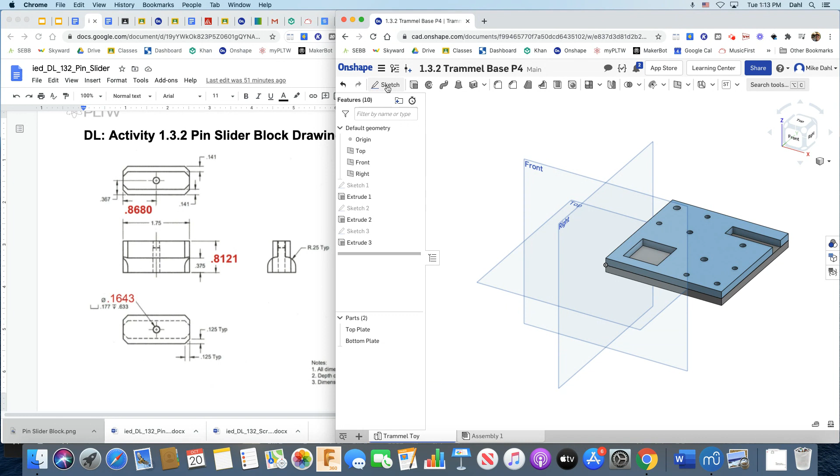Let's just start a new sketch on the top. I'm going to make this rectangular part here, and let's go ahead and make a rectangle. I need the overall length to be 1.75. That width only shows us half of the width, and that 0.367 gets you from the edge to the center of the circle.

So when I dimension this side, oops, let me move this over. When I dimension this side, I can say it's 0.367, and then shift 8 means times 2. So I'll get twice that distance, and now I've got it right there.

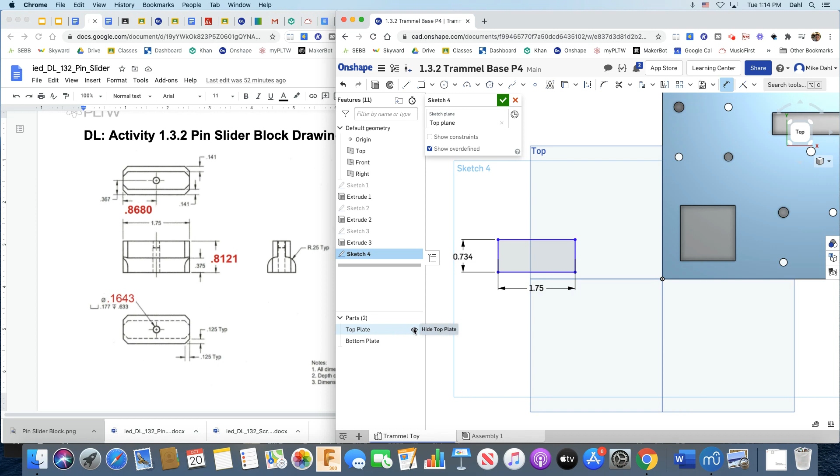Now, I don't really need to be looking at the top plate, so I'm going to hide it, and the bottom plate too, don't need those right now. I'm just going to focus on building this guy.

So let's extrude it up, this 0.375. Actually, let's go all the way, why not? What do you think? Yeah, let's go all the way. 0.8121, so let's extrude that. 0.8121 gets us all the way to the top.

Now I'll kind of subtract some of the material from there. And let's get this right here. Let's look at the right view, and that's going to be this here.

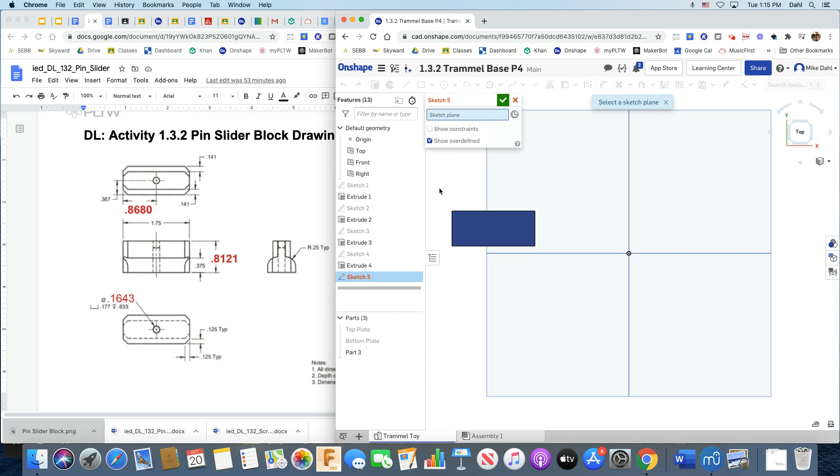So let me get rid of, let me go to the top, and let's remove this 0.141 amount there. So let me do a sketch on the top here, and let's grab this rectangle. I made sure that I got a coincident constraint there, and go all the way across, make it coincident there. That's good, this 1.75 is good. And this needs to be, oops, let me dimension it now - this needs to be 0.141.

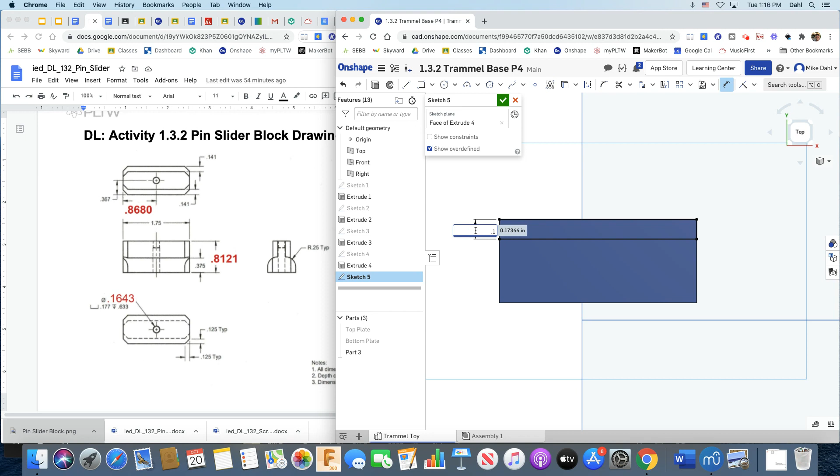Then let's do that again, another rectangle. Oh, look at that, how did it know I wanted 0.141 there? Cool. Now I'm going to take it a little bit out of perspective here.

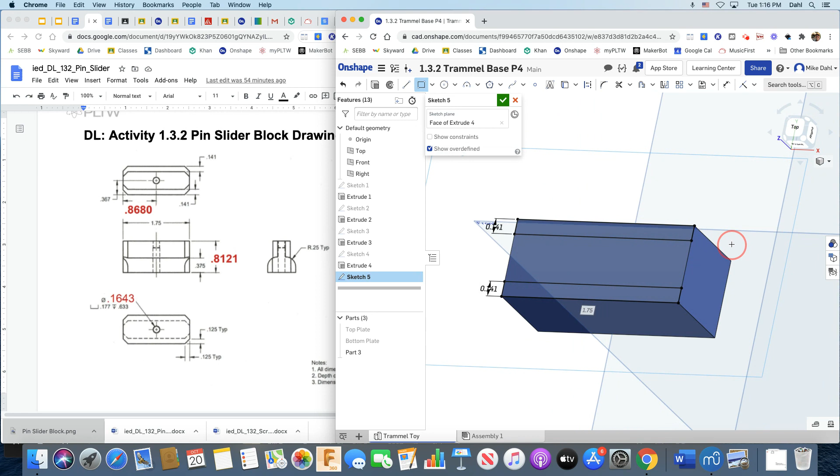Let's extrude those down, the 0.8121 minus the 0.375, and that should get us there. So I'm going to extrude in the other direction, remove, a distance of 0.8121 minus this 0.375. It does the arithmetic for me, and yay, getting pretty close.

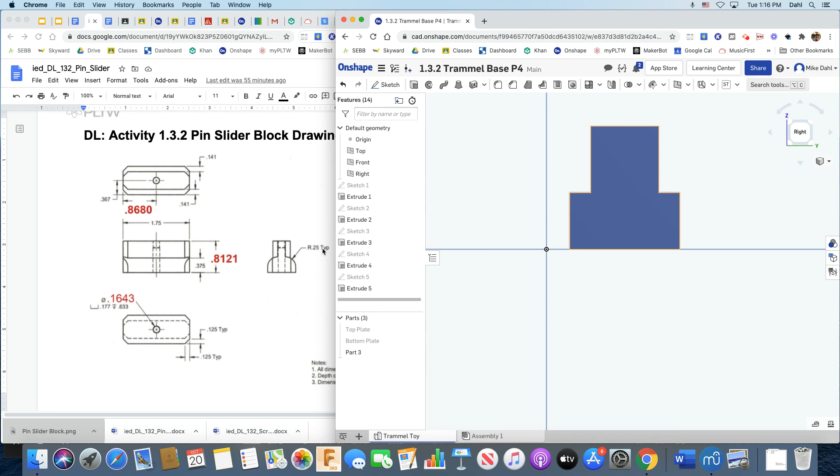I just got to round some things off here, like this round is 0.25, and it says TYP, that means typical - anywhere you see something that looks like that, you can assume it's a 0.25. What would that be called? A fillet. So let me grab my fillet tool, stick it on this corner, and make it 0.25. And I'll do that over here as well. I think that's good - accept that.

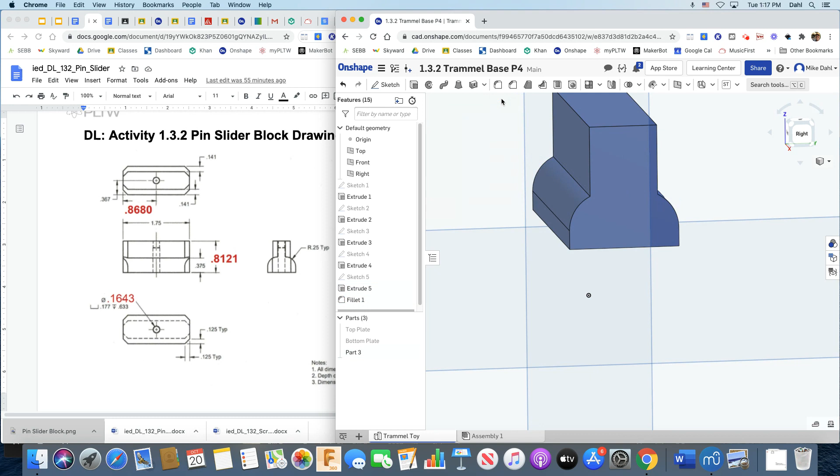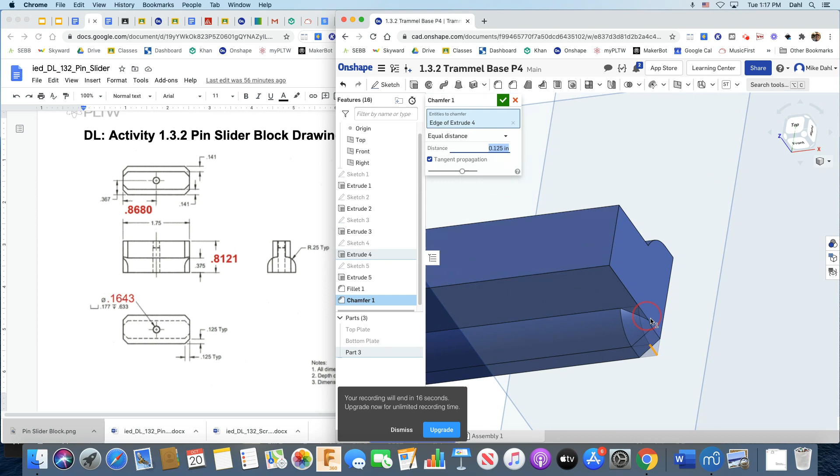Cool, now let's take a look at the top, and let's do the chamfer on the corners. That chamfer is 0.125. Anywhere I see it, since it says typical, I can assume it's that kind of chamfer. So let's do that here and make that 0.125, and let's do that on all 4 of those corners. Chamfer, chamfer, chamfer. Cool, looks like I'm running out of time.

I will finish up on the next one.